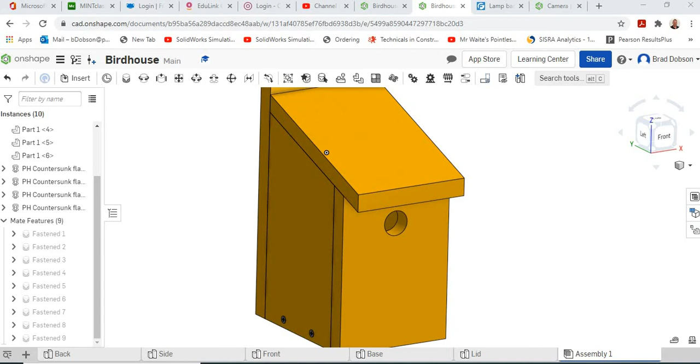So we've got our finished assembly all done and dusted. Clearly we could add more parts to that. We could put our little felt hinge on, and we could put staples, and we haven't got the biscuits, but we'll look at that later on.

I want to try and get us onto the next stage of what we can do with Onshape. Clearly you can see it gives us a basic good 3D representation. There's quite a number of different features we could use to present our drawing work. If you go to this icon in the corner, bottom right, you can see options for camera and render options.

If you click on the little arrow, we're just going to go through it. If I wanted a perfect isometric, I can just click on isometric, and it'll produce a perfect isometric drawing of what we've created. This is the sort of thing you might have done in Key Stage 3, we quite often do isometric drawing. Dimetric and trimetric are just a slightly different angle version of isometric.

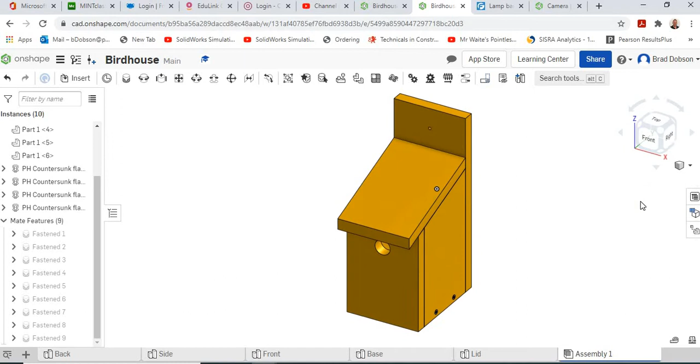So you can get three different views there. I'm just going to go back to isometric. I can also, you've got zoom to fit and zoom to window.

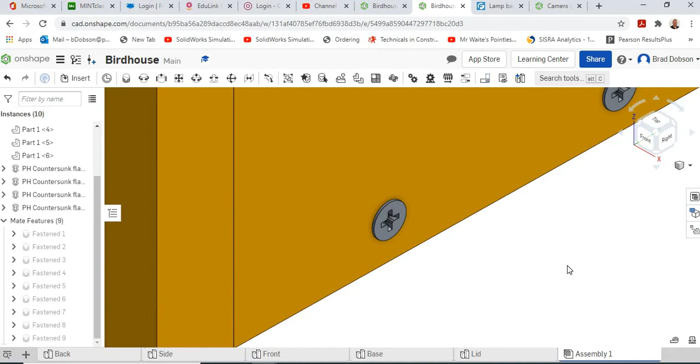If you ever get stuck, if I zoom out dead small, you can actually do that. Zoom to fit saves you doing all the panning. Zoom to window is basically dragging a box around a section, so if you wanted a bit of a close-up, you can use it to get a close-up of that section. Go back to zoom to fit window.

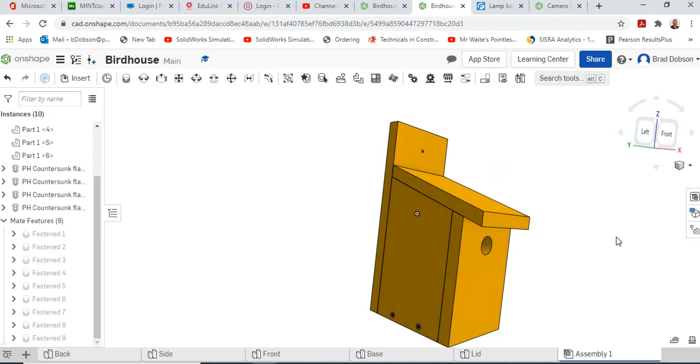We can then turn perspective on. At the moment we haven't got any perspective at all, but if I turn perspective on, you can see I start getting a more realistic view of what the product looks like. When it's very close it always looks a bit funny, but if you get the right angle, that's obviously how we see things in real life with perspective.

For folder work and presentation work, it's sometimes quite nice to have perspective on. I'm just going to put isometric back on, turn perspective off, turn it back to isometric.

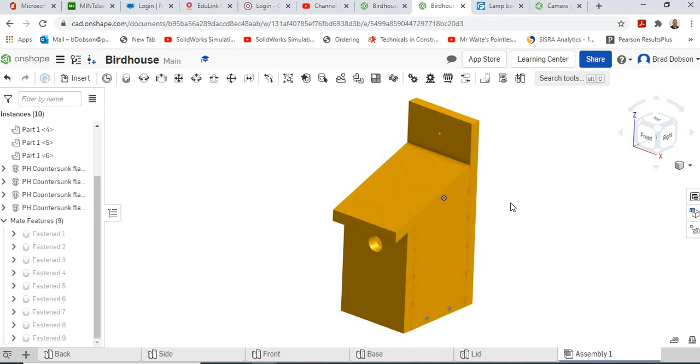At the bottom, I can have shaded without the darkened outlined edges. It's a bit difficult to see some of the details when you do that, but there are some instances when you might want that.

I've got shaded with hidden edges, so you can see it gives me the internals - I can see where my screws and my pilot holes were, etc. If I'd have drawn the biscuit slots in the biscuits, they would show up too. So that's quite a useful one to have a look at.

Hidden edges removed - I literally get a sort of IKEA catalogue look. I describe this one as a real nice, plain, simple view of the drawing as an outline, a bit like what we've done in our hand drawing work.

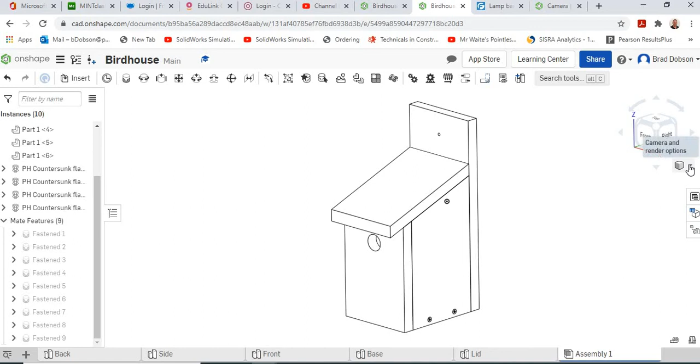I can also have that on perspective as well, so I can mix and match between the different views, whether I want perspective on or not.

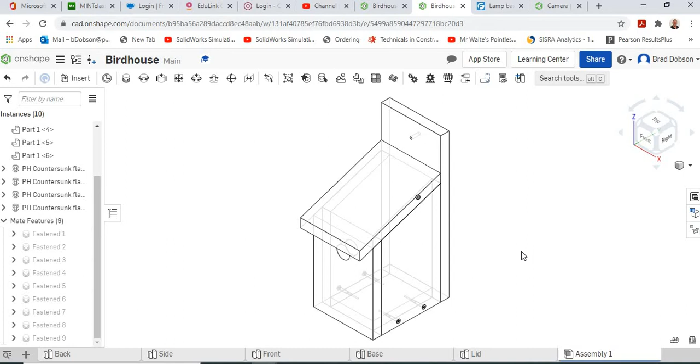You can see I can do this hidden edges visible - it's like a sort of blueprint drawing. So I've got the outline, but it's also got the hidden detail grayed out there, exactly the same. So I can have that view.

I can have translucent, so I can see it all as sort of see-through parts. That's sometimes quite nice - you can imagine that as an assembly drawing, things like that.

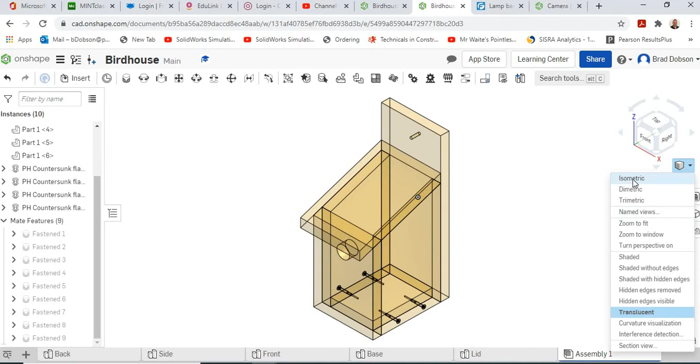I won't worry about the bottom views, they're a bit more complicated, so don't worry about those. What I'd like you to do as part of the task is to just create a few different views, so I can see that you're using them.

So we might start off with a perfect isometric. You would then print screen that, put it onto a PowerPoint. You then might change it to hidden edges, but put it in perspective, so I can see you get it in the position you want. Print screen it again so I can see that you're using the different functions.

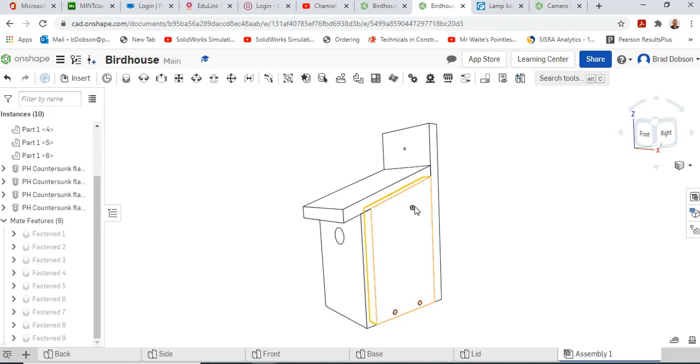If you want to get rid of this origin, if you right click over it when it's selected, you can actually hide that, so remove it completely from your drawing. So that's how we can look at it in different views.

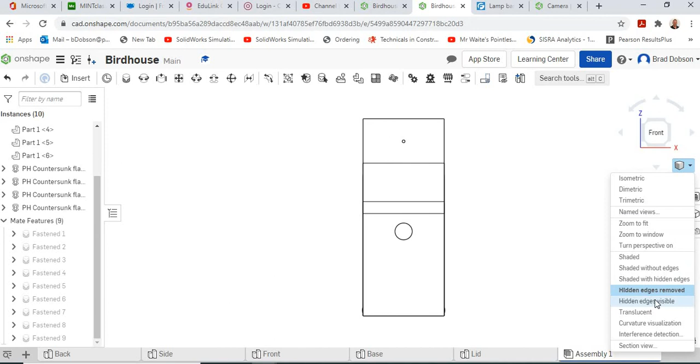I could actually look at it as a perfect front view - if I wanted it perfect, I need to take off perspective to get a perfect front view. Sometimes nice with the hidden detail. If I rotate around, go to the right, I can get a perfect side view, and I can obviously get a perfect back view, and then a perfect top view.

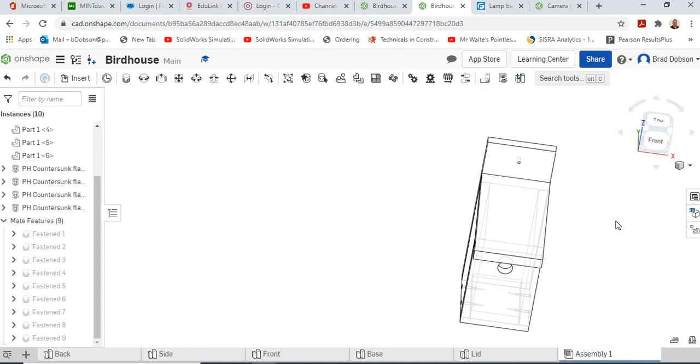You can see that you can produce some nice details and bits and pieces using those basic functions. So that's the sort of basics of what we can do regarding viewing and rendering techniques, all that.

Have a little play. Screenshot a few little examples, put it on a PowerPoint, and you can upload it to the assignment when I set the assignments.